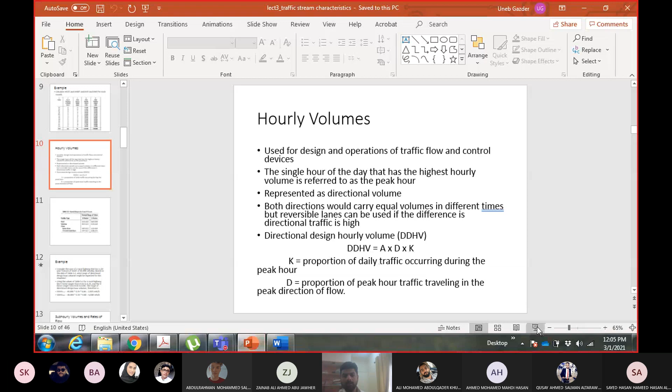Okay, so I was saying, I was talking about A. So A is any type of daily volume which is suitable for your need and which is available. So for example, I don't want to take the average of the whole week. I just want the average of only weekdays because I feel weekdays are more important. Then A will be either AAWT or AWT, whichever is available.

Or if I feel that all days of the week are the same to me, then I may take ADT or AADT, whichever is available. Usually annual averages AADT and AAWT are more preferred than AWT and ADT, because obviously if you have the data of the whole year, why would you take the lesser one? ADT and AWT are for less than 1 year. Why should I take less than 1 year if I have the full year? So AADT and AAWT are more preferred, whatever suits you.

And obviously if they are not available, then you go for ADT and AWT, whichever of them is more suitable for the application. And as I said, you multiply them with D and K factors, and these are the D and K factors which depend upon the type of area. And for urban area, we have different factors for type of highway as well.

Now, one thing which I explained yesterday at the end of the class was why these factors are decreasing from rural to urban areas. Can someone recall what I said? From rural to urban areas, these factors are decreasing, K as well as D. What is the reason? Yes, go ahead. Anyone? No one? Why are these factors decreasing when I go from rural to urban? What is the difference between rural and urban areas?

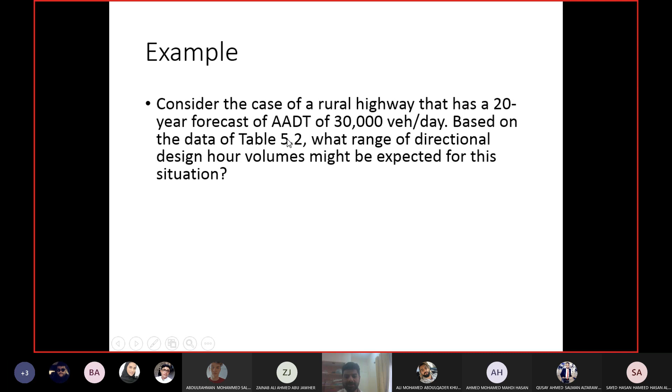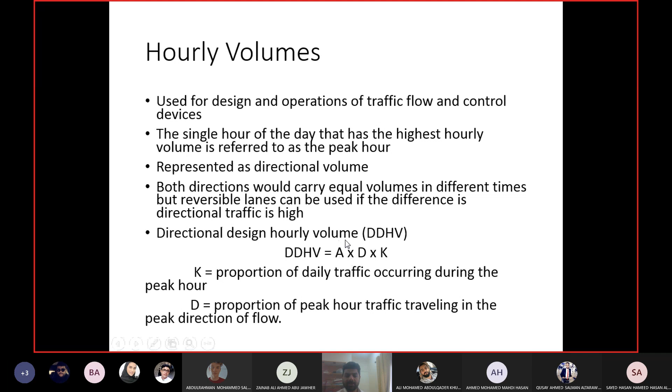We have to find out the directional design hourly volume, the DDHV, for this situation, using the factors given in table 5.2. This is table 5.2, you can see the table number here. So using these factors, you have to calculate DDHV. Now, if you go to the DDHV equation, you take the daily volume multiplied by D and K factors.

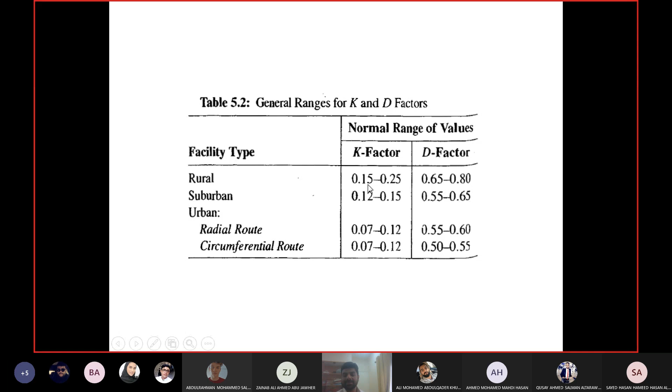The highway which is given is a rural highway. So you can see the K factor has a range and the D factor also has a range. These are ranges, not a single factor. So within the range, I can use different factors. In this example, I will use the complete range. So you can see here, two DDHVs are calculated.

One using the minimum values. 0.15 is the minimum for K and 0.25 is the maximum for K. And then 0.65 and 0.8 are the minimum and maximum for the D value, both of them for rural highways.

So you can see when I use the minimum values, DDHV, the lowest value is 2,925 vehicles per hour, and the highest value is 6,000 vehicles per hour. Now you can see the difference here. How much is the difference? So one value is less than 3,000, the other value goes to 6,000. So the value has doubled.

Even for the same type of area, you can have a lot of variation in your design volume. By taking the lower value or the higher values, you can have a lot of change in your design volume. So how do we select the value from the range? Again, it will go back to the point of population density. I already told you when population density is higher, the factors should be taken from the lower values of the range. Population density and traffic variation are inversely proportional.

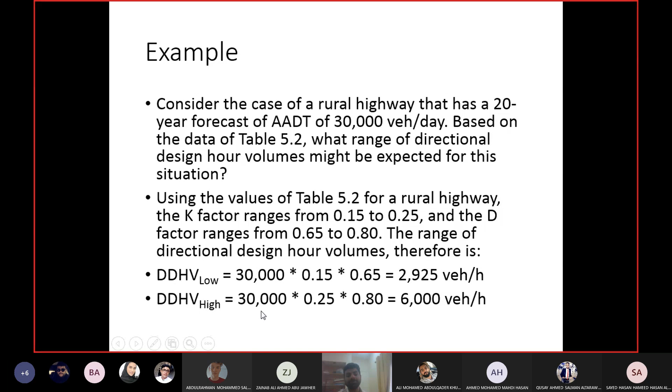Okay, then we have the sub-hourly volumes and rates of flow. Sub-hourly volume is what I called earlier as the flow. Sub-hourly volume and flow are the same thing. So this is the count of vehicles for less than 1 hour. That's why they call it sub-hourly volume. And when you have the flow value, you multiply by 4 or something else to convert it to 1 hour. It becomes rate of flow. So sub-hourly volume is for less than 1 hour; when you convert it to 1 hour, it becomes rate of flow.

Now, why should we consider sub-hourly volume? Because within the hour, traffic does not move with the same flow. The rate of flow within the hour is not the same. For example, if you observe 6,000 vehicles in 1 hour, that doesn't mean that each 15 minutes had 1,500 vehicles. 6,000 divided by 60 gives you 100. So did we observe 100 vehicles every minute? No. There were different counts every minute, every 15 minutes, every 10 minutes and so on.

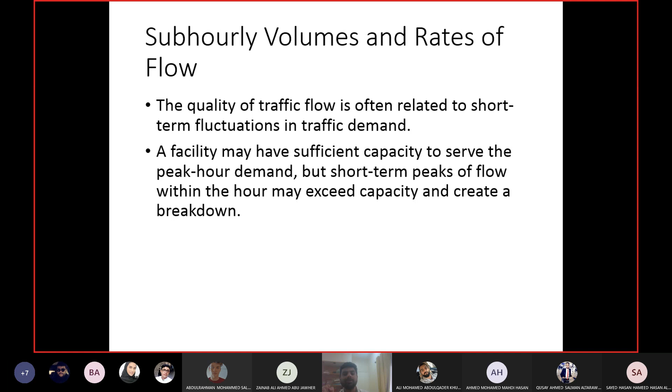Because if you ignore it, then your facility may face a breakdown, meaning congestion, queue, traffic jam, even before reaching its capacity. So your facility will not be able to reach its potential capacity if you ignore the sub-hourly fluctuation in your design. Within the peak hour, you have to consider how the traffic is fluctuating in different time intervals. Okay, how? Let me show it to you.

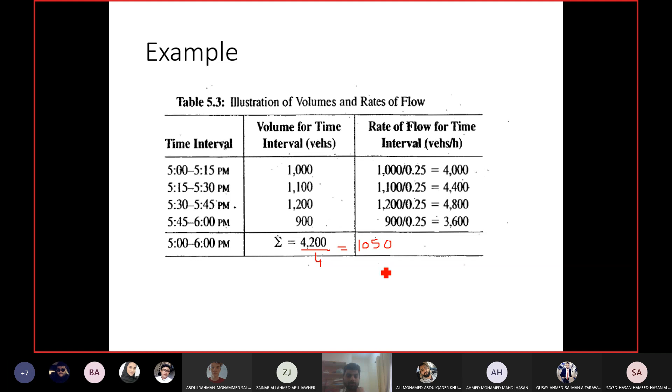1,050. Okay, so this facility is designed to have a maximum flow in 15 minutes of 1,050 vehicles. Maximum volume of 4,200 vehicles in an hour, but maximum flow of 1,050 vehicles in 15 minutes. And you can see that some of these flow values are more than this. Okay, now let us see what will be the effect of them.

So now we have vehicles arriving, which is what I'm observing from the field, and vehicles departing is the maximum 15-minute flow you can have from this segment, which you calculated to be 1,050. So in the first 15 minutes, 1,000 vehicles are arriving, and the capacity is 1,050. They are less than the capacity of the road, so they will pass without any problem.

In the next 15-minute interval, 1,100 vehicles come, and capacity obviously cannot change. Capacity will remain the same until you change the design of the road. So the capacity is still 1,050. The vehicles arriving are more than capacity. What will happen? Out of 1,100, 1,050 will pass because that is the capacity. The remaining 50 will form a queue.

The remaining 50 will be waiting in a queue at the start of the facility because they do not have the chance to pass. So at 5:30 p.m. I will have 50 vehicles in the queue. Then from 5:30 to 5:45, 1,200 vehicles arriving. Capacity is still the same. So out of 1,200, 1,050 will pass. So how many left out of 1,200? 150. So these 150 vehicles will add to the queue again.

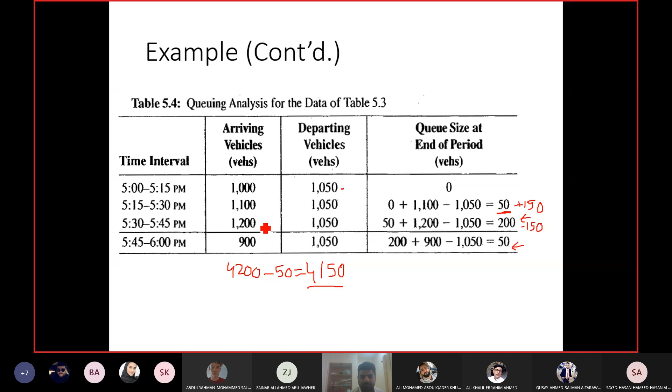But how do we calculate peak hour factor using the volume and the peak flow rate? You can see the equation here. Peak hour factor is the ratio of hourly volume to peak flow rate. Hourly volume means the total volume you have for 1 hour. Peak flow rate means take the maximum value and calculate the flow rate for it. If it is for 15 minutes, flow rate means take this value multiplied by 4, or divided by 0.25. This will give you the peak hour factor.

So capital V is hourly volume, and small v m15 means the maximum 15-minute flow you have within the hour, then multiply by 4 to convert it to flow rate. 15 minutes is the flow, multiply by 4 to calculate the flow rate.

So in the previous example, how much was the hourly volume? 4,200. Yes. And the peak 15 minutes flow, how much? 1,200. So 4 multiplied by 1,200, or 1,200 divided by 0.25. Both are correct and will give the same answer. If you do it, you will get a peak hour factor of 0.875. So this is for the previous example.

And now peak hour factor has a range of 1 to 0.25. So it ranges from 1 to 0.25. 1 means what? 1 means all 15-minute intervals had the same value. All 15-minute flow rates were the same. That will give you a peak hour factor of 1. If all 15-minute intervals have the same flow of vehicles, that will make peak hour factor 1. So this is an extreme case, very rare.

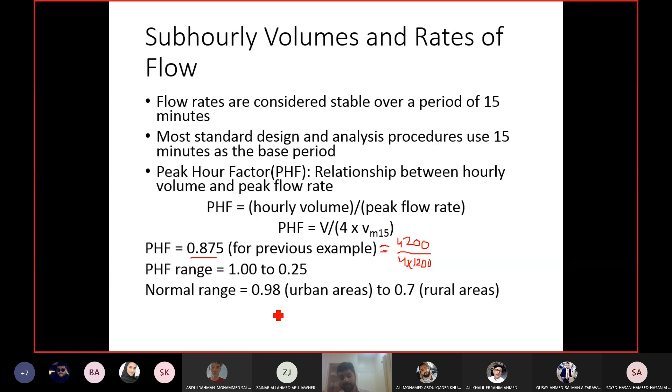Then we talk about the other macroscopic parameters, which are speed and travel time. We know speed is related to travel time, right? To calculate speed, you do distance over time. If speed is increasing, the travel time is decreasing. Now travel time is defined as the time required to traverse or pass a section of the highway. Many of you in your term projects measured speed using this approach. You fixed a distance, measured the time of the vehicle to cover that distance, then calculated the speed. So you know how speed and travel time are related to each other.

Now here we are talking about speed as a macroscopic parameter. So we are not talking about the speed of one car or one vehicle. We are talking about the average speed of a number of vehicles. Now there are two types of mean or average speeds. We call them time mean speed and space mean speed.

What is time mean speed? It's the mean speed of the vehicles which are passing over a point or lane of the highway over a specific time period. And space mean speed is the mean speed of the vehicles which are occupying a given section or lane of the highway over a specific time period. Now you would say both these definitions look the same. I will point out the difference here, and then try to explain it in a manner that you can understand better. The main difference between the two definitions is here: this is passing over a point, and this is occupying a given section.

Okay. Now let me try to explain you in a simple manner. In time mean speed, you don't have to find out the travel time of the whole section. You may do it, you may not do it. You can even take the speed over a point, like they have mentioned here.

Like some of you did in your term project, you used a mobile app, which I told you, the speed gun, and you measured the speed over a point. So you did not cover the whole section, right? The speed which you measured at that point may not remain the same throughout the section. Okay, so that speed was only for that point.

So you took speeds over a point or a particular distance of the highway. Any distance of the highway. It can be equal to the length of the section, it may not be equal to the length of the section. But if you are calculating time mean speed, this is not important. So you found the speed using a device for a number of vehicles, and you took the mean. That will be time mean speed.

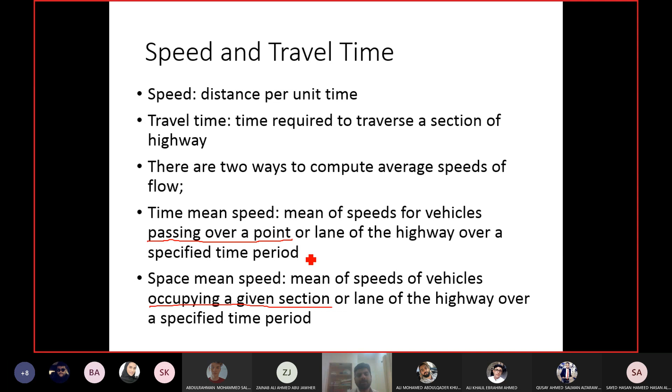Okay. Now let me show you the calculations here. TMS, time mean speed. SMS, what? Short messaging service, right? No, space mean speed.

So you can see there's a slight difference in the calculation of TMS and SMS. In TMS, we are taking the summation of speed of individual vehicles and dividing by number of vehicles. N is the number of vehicles for which you measured the speed. So D can be different for each vehicle. Or instead of doing D upon T, you can simply replace it with the value of S.

If you have used a speed gun or a speed camera, then you don't have to do D upon T, right? You can simply put the value of speed. So it will be speed of individual vehicles, and you take the summation divided by N. So D is not important here. Each vehicle can have a different D, or you can directly put the value of speed instead of D upon T. But in terms of SMS, you see a constant D here in the numerator.

So this D is the total length of the section. So in your case, I did not specify which length of the section you should take and how much should be the length. So everybody took D as per their own convenience, right? Somebody took it in the middle of the section, somebody took 90 meters, somebody took 100 meters. So you were basically calculating TMS. You were not calculating SMS.

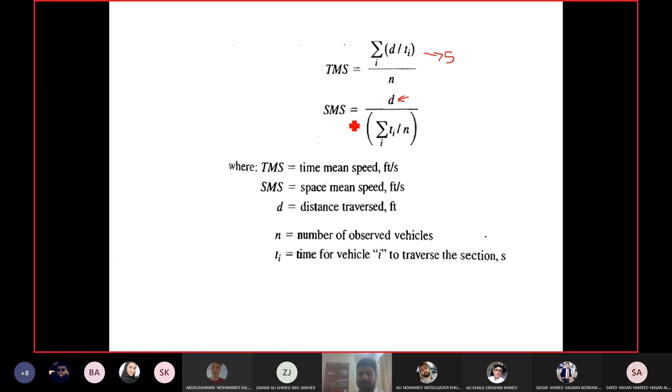D can be the same for all the vehicles, or D can be different for all the vehicles. It does not matter. But for SMS, D should be the length of the section. So even if D is the length of the section for TMS, this calculation will make it different from SMS. Even if you put D as the length of the section, it will not be the same as SMS, because of the calculation.

Let us look at an example here. So the speed of 6 vehicles has been observed using travel time, and for all these vehicles the distance was 1000 feet. So distance was kept the same, and they observed travel time for each vehicle. And then they have calculated, you can see, for each vehicle the individual speed: 1000 upon t, right? 1000 is the distance, t is the travel time for this vehicle, this is the speed. So you keep changing the travel time, you get different values of speed.

In the end, they take the summation of all the speeds and then divide by 6, which is the number of vehicles. You get the average speed. Now, which average speed is this, 50.6? Is it TMS or SMS? You took the summation of individual speeds and then you took the average. So the speed calculated in this manner, is it TMS or SMS? TMS. Yeah, it is TMS.

For SMS, distance will remain the same, 1000 feet, and then I will divide it by the average of the travel time. So you see, summation of the travel time, 119 seconds, divided by 6, which is the number of vehicles, and you get 19.8. So 1000 divided by 19.8 will give you the SMS. Now you can see, like I said, even if you have the same distance, you can still calculate TMS and SMS differently by using the two different equations. So 50.6 is calculated using the equation of TMS, and 50.4 is calculated using the equation of SMS.

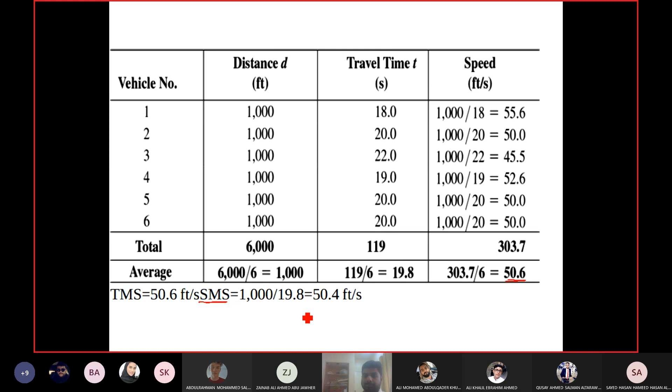Okay, now we will talk about the third macroscopic parameter, which is density. Traffic density is very similar to density of a material. How do you define the density of a material? If I ask you define density of a material, how do we define it? Mass over volume. Okay, so mass over space. In case of traffic density, mass is mass of vehicles, number of vehicles, and space is length of the road. So traffic density is number of vehicles over the length of the road.

Length of the highway or a lane, you can say, okay, I will only measure density for a lane. Even with the speed or the volume, in all these cases, we were saying highway or the lane, section or the lane. So you can fix any of these parameters for a lane. You can say, okay, I will only do the calculation for one lane. Okay, so density, volume, speed, all these things can be for one lane as well.

So density can be number of vehicles occupying a length of the highway or a lane, and that length is normally 1 mile or 1 kilometer. In Bahrain we use kilometers, in USA they use miles. So density is vehicles per mile, or vehicles per mile per lane if you are fixing a lane. So density is the number of vehicles which are in 1 mile length of the highway, or in 1 kilometer length of the highway or of a lane. So you can imagine it is very difficult to measure it directly from the field.

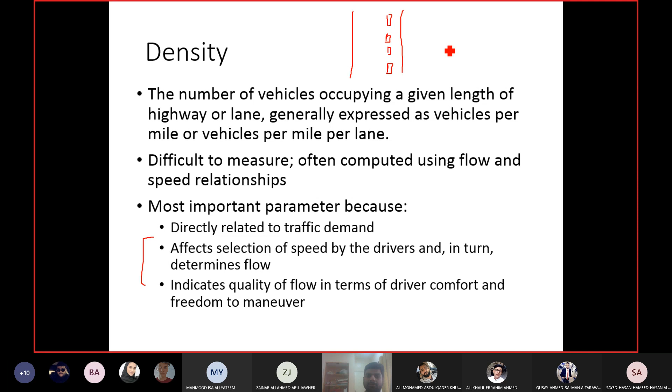So since density is affecting so many things, that's why it's important. That's why we calculate it. And later on, in the last chapters of this course, you will see how to use density to find out some other parameters. So this is the end of macroscopic parameters. Now we will start the discussion of microscopic parameters. Just to explain, there were three parameters: speed of individual vehicles, spacing, and headway. Spacing and headway are for pairs of vehicles.

Speed of individual vehicles obviously is for individual vehicles, but we will not discuss it again because we already saw it when we were calculating the mean speeds, SMS and TMS. We already saw how to calculate the speed of individual vehicles. This is very basic. So I will just discuss spacing and headway as microscopic parameters, but I will do it tomorrow, inshallah.